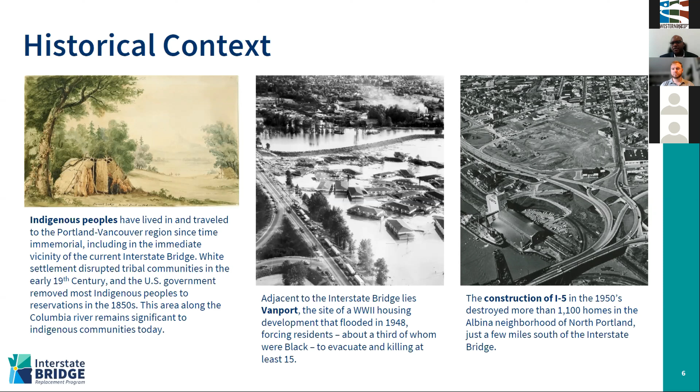As indicated earlier, the construction of I-5 in the 1950s destroyed more than 1,100 homes in the Albina neighborhood of North Portland, just a few miles south of the interstate bridge. The reason why that's important is as ODOT has been trying to advance the Rose Quarter improvement program, it is still stuck in this very deep and troubled history. That's kind of what's been impacting that project's ability of moving forward. So how do you really integrate equity in a way that is restorative and intentional? How do you leverage significant investment to improve the Rose corridor, but also pay tribute and homage to the long history, and leverage those dollars in a way you can never repair, but you can hopefully lessen some of the pain and create new opportunities. That's kind of the challenge in some of these projects.

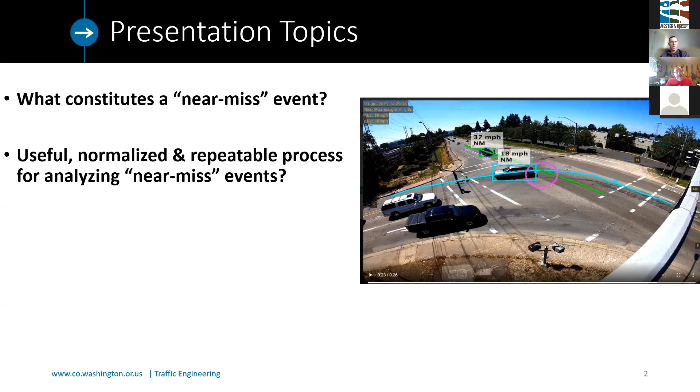So you might have heard this term, different vendors talking about it: big data, artificial intelligence, machine learning. The reality is you still got to look at the data, and you still got to have common sets of definitions like we heard in the previous presentation, so that we can be talking from the same page and comparing apples to apples. And then for this use case, we looked at 14 intersections across Washington County, our higher crash locations. And when we're looking at these data sets spatially, not only from a temporal standpoint, but spatially across the county, how do we normalize so that we can do that fair comparison of these results and do some sort of relative metrics?

And then we wanted to ask the question of, okay, well, we've got some near miss information related to left turn crashes at intersections. How do these relate to our reported crashes? We'd expect a fairly strong correlation between the two, but we didn't know for sure. So I'll talk a little bit about that, and then talk about how we're using some of the data to identify some lower hanging fruit for safety treatments and some future research needs.

So the tool that we used for this analysis in Washington County is Street Simplified. And that's a whole different presentation about their tool set. I'm going to skip to the meat of this, which is they have some assumptions that they've made when they deliver the data to their clients as far as what constitutes a near miss. So what they're assuming, at least as a default, is all movements, all roadway users, all types get counted, all the different speeds get counted, and then all of the severities that they use as their metric, but also post encroachment time.

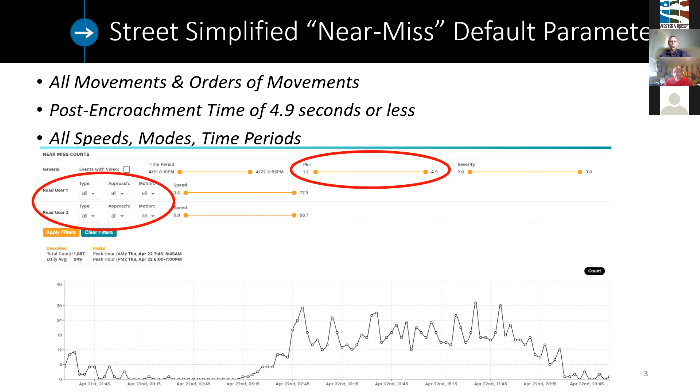That's what this PET is, that's circled. They're making the assumption that, at least out of the box, everything that's 5 seconds or less as a post encroachment time is called a near miss by them. Watching the videos and looking at it with some engineering judgment, a good portion of these events are not necessarily high risk or even what I would call near miss.

So what we focused on in our analysis was looking at, for left turns, those vehicles that turn in front of oncoming traffic. So again, order is mattering. If somebody's kind of aggressive as a sneaker and they go right after the vehicle that's oncoming goes through the intersection, that's not as big of a deal as someone that is turning in front of oncoming traffic. That is much more likely to generate a crash, or in our opinion, a near miss.

So we have the ability, at least within this software platform, to filter that by motion first for roadway user 1 left, and then roadway user 2 setting it up as motion through, and then running a query on the results to look at that.

And then we also used the post encroachment time threshold. We subjectively set that at 3 seconds. That's based on watching some videos and knowing that we only have 1 day or 2 days, or in some cases 3 days worth of data at each intersection. The vast majority are 1 to 2 days. So we don't have a ton of data over time. We're trying to infer some information from relatively limited sample sizing.

For that reason, we went ahead with something that's a little bit longer of a post encroachment time than what we otherwise might use. So we ended up using 3 seconds. I would submit that something probably closer to 2.5 or 2 seconds are really those higher risk type events. But using that 3 second threshold allows us at least to have something consistent between the intersections to look at, and allows us enough data to do some analysis.

I think our values were a little bit less than that, but I'd have to go back and look at the data. So again, those were the near miss thresholds that we used: turning in front of oncoming traffic, and then a PET time less than 3 seconds.

And what we saw in looking at some of the data is that no two events are the same. Context really matters. So you got to watch the videos, particularly for these higher risk events. But the nice thing is that as you use these thresholds of lower post-encroachment time and constraining that movement order, you exponentially reduce the number of events and videos that you have to watch. So that's a good thing. That makes it a little easier to look at the context around each event.

But it is interesting to see the different modal users at the intersection and the context for the traffic signal phasing and what's going on as the events happen. And then, at least for Street Simplified, they stratify the data into these near miss versus speeding versus red light running versus blocking versus jaywalking events. So you've got to watch not just the near miss events, you want to look at the other high risk events too, to get a better picture of the high risk behavior that's happening at the intersections.

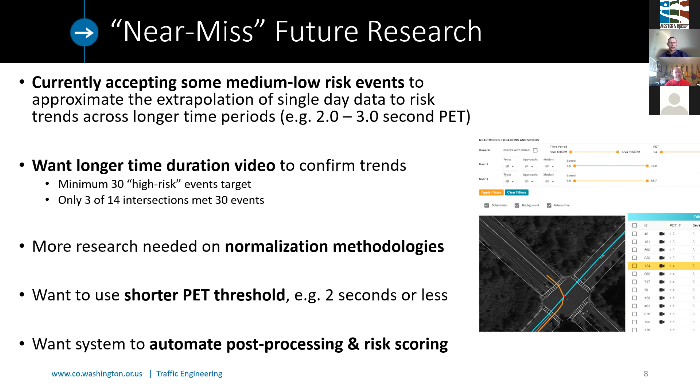So the other piece we looked at was comparing crashes to near miss events. The challenge here is, again, we were looking at very low trend data for the Street Simplified data, 1 to 3 days. And then we compared that versus the 3 most recent years of left turn related crashes, 2017 to 2019. So we've got a mismatch already in the dates and the scale with which we're analyzing this data. We just want to throw that out there.

But we still went ahead and did the comparison, trying to isolate as best we can. The isolation is really around normalization for near misses. We looked at it based on just using time, trying to make sure the time periods overlapped for our intersections. Then we looked at a time and volume-based normalization, where we combined the two approaches.

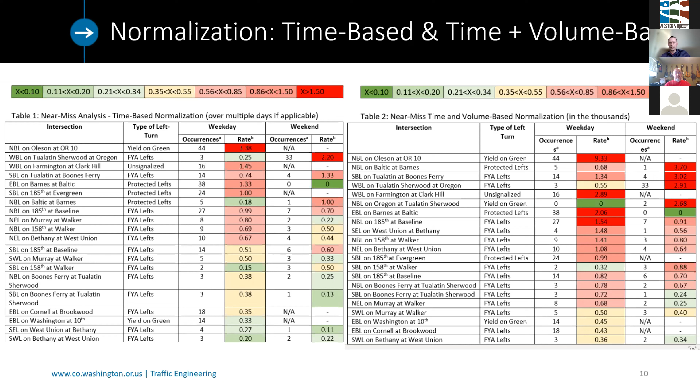And then the near miss time and volume base—this is a different normalization methodology, again isolating to about thousands in ADT. This looks at the differences between rankings, so you can see them side by side. We've tried to use color coding to show gradation there. The near miss rates are interesting—you can glean some information off of weekday versus weekend, and then the different normalization methods. They produce similar results, not the same, but similar, comparing the two.

Then if you look at table 3 in our report, which looked at crash rates versus our near miss rates—we held the crash rate, sorted by crash rate, and then looked at near miss normalizations. What this shows us is not a great correlation. We went through and did a little statistical analysis on the actual correlation coefficient. Something that is a 1 or -1 is a perfect fit, and 0 means no relationship between the data sets. The time-based and time-and-volume-based normalization results weren't a great fit for crash rates versus near misses.

The two normalization rates have a pretty close fit, which is good—that's what we would expect. But the crash rates do not match up very well, at least in this first pass at looking at 14 intersections here in Washington County for left turn related crashes.

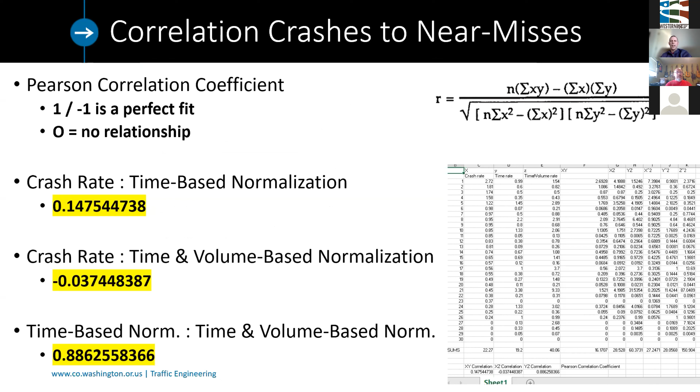But not all is lost. We went through and still looked at the videos. We made some judgments around which locations were the most egregious and where we could actually do some things. So you see rank number 5 here, this westbound on Tualatin Sherwood at Oregon Street.

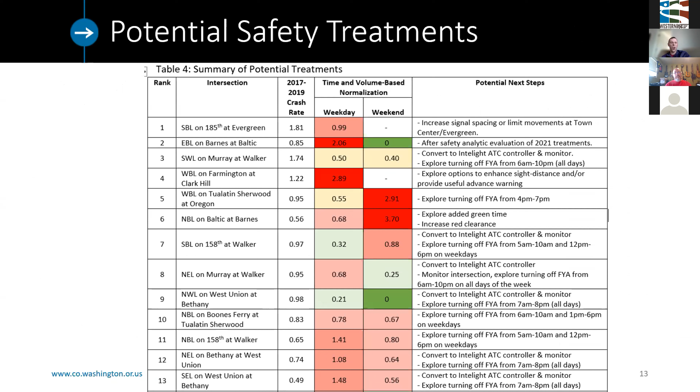We've actually explored turning off the flashing arrow. In the meantime, we've actually made the flashing arrow harder to turn on. So there's a number of different things that we've done to try to take the data and think through low-hanging

and higher cost treatments. So, from a signal timing perspective, we want to upgrade our controller so we have higher resolution logging. We want to look at modifying those left turn parameters, again making it harder for that flashing arrow to turn on. And then also making sure that we've got some of the different tools in our toolbox for separating conflicts between pedestrians and left turning traffic, and reducing pedestrian delay at some of our intersections.

And then the heavier handed option is to actually turn off the flashing yellow arrow or the permissive left turn by time of day, which we've done at 2 of our highest crash locations at the county.

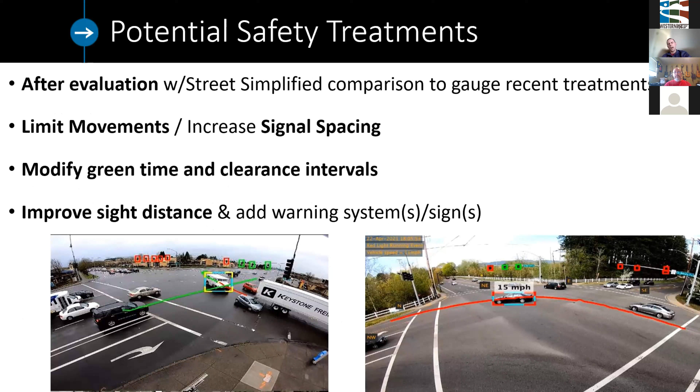The other options that are out there are limiting movements, increasing signal spacing, modifying the green time and clearance intervals, and then looking for ways to improve sight distance or adding warning signs, striping, other things that are more traditional.

So again, just to reiterate, the research needs regarding near miss is we need a consistent definition of what a near miss event is. We need to, as an industry, think through what those minimum samples are to reliably gauge near miss events and kind of the time period of video that we might need to produce those number of samples of higher risk near miss events, because it'll inform scoping for projects.

And then I think we need more research on normalization methodologies and kind of looking at what's reasonable to expect for the fit between crash data and these near miss events. And then obviously we want to automate a lot of this process.

So in conclusion, the near miss data is useful, at least as a starting point for augmenting some of the crash data. There's not a great fit between the two, but I think it's useful in augmenting and trying to be proactive in managing safety and conflicts at our intersections.

Just understanding that that subjective versus objective is still out there. And as an industry, we want to try to at least be transparent when we're making a subjective claim. And just note that this comparative analysis appears based on my conversations and interactions with folks in the industry and talking to some of the vendors.

It seems to be in its infancy. I think a lot of the vendors are trying to build tools around what we want. But as a community, we need to have a clear definition of what's going to be useful to us so that we can define how we want vendors to set up these tools to automate.

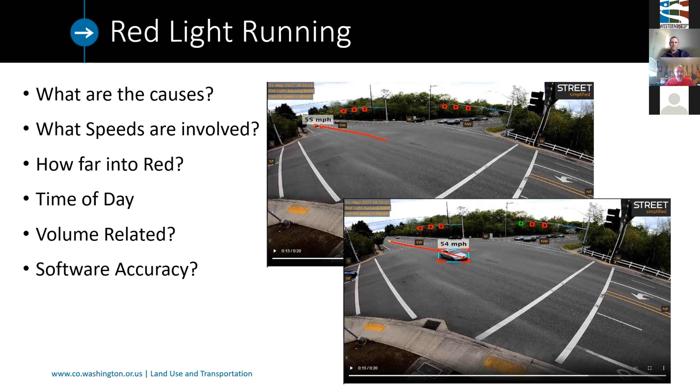and if the events are a function of the roadway volume. This also gave us an opportunity to do some QA/QC on the street simplified algorithms, although we're only able to determine if the algorithm correctly categorized the event, not whether or not the algorithm caught all the events.

Here's a quick example of what you see when you look at the video from Street Simplified. And you can see it shows you the indications and the trajectories of the car. And so here comes our red light runner.

And we could probably skip the next one just for time. It's just another example. Probably go to the next slide after that.

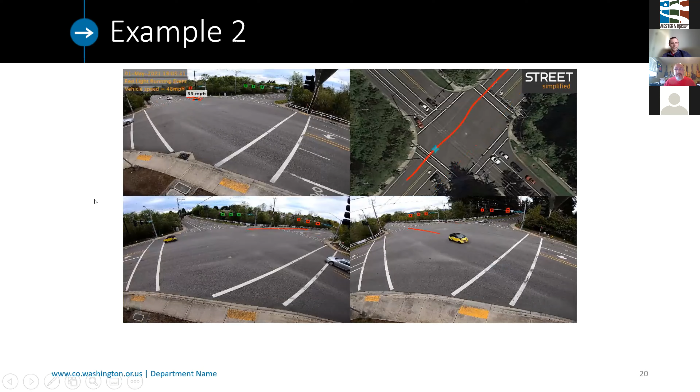So I had 13 high crash locations, one of which Sean looked at was a non-signalized intersection, which gave us about 27 days of data. They have video recording with 2 cameras at the intersection, and then they process the data to determine vehicle and pedestrian volumes, near misses, red light running, and other metrics.

For this analysis, we looked at red light running for the through movements only, which gave us about 750,000 entering vehicles to look at. Red light running was defined as a vehicle passing the upstream crosswalk line after the red indication was presented.

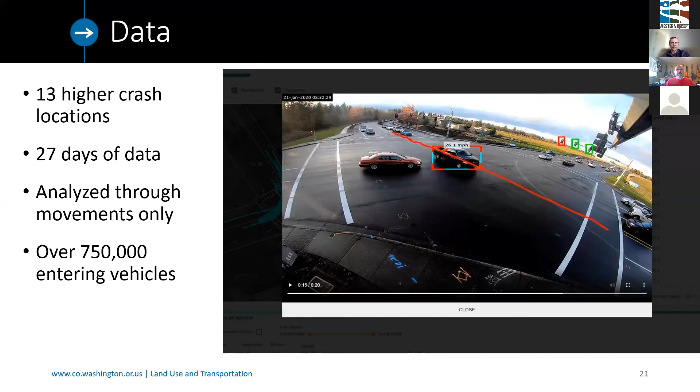So we have our probable causes, and we figured there were about 5 basic reasons why you would run a red light. First would be an emergency vehicle, like fire, police, or ambulances - for this analysis we took those out. Second would be a blatant disregard for the red indication, or maybe a distracted driver - we expected those would occur late into the red time.

Third would be if there was congestion downstream and the driver doesn't want to wait through another cycle, so they sneak across. The next would be a late night low volume occurrence, when you pull up to a red light, assess it, see there's no one coming, and go ahead and go through. Lastly, we have drivers who determine there's enough amber or yellow time to get through the intersection before the red indication, or who've determined they don't have the ability to stop safely.

We're working with Street Simplified to get a report that will give us a couple different speed points, one at the beginning and one at the stop bar, so we can tell if people are speeding up or slowing down as they come into the intersection.

After filtering out all the emergency vehicles and events that were logged incorrectly by the algorithm, be it a bike or a wide turning truck or a train, we tossed those out. So we had about 335 separate events.

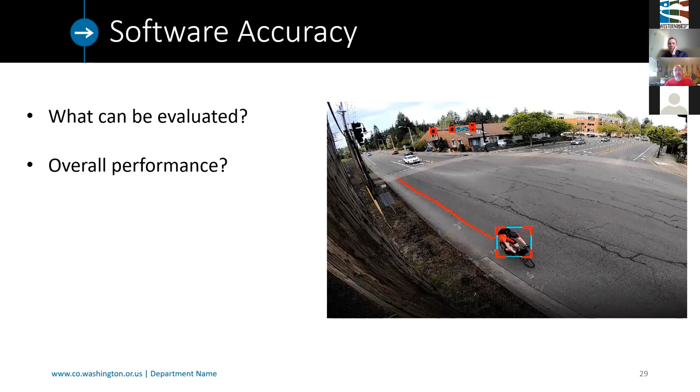That's specific to red light running, the filtering they're doing for that portion of the algorithm. They do try to split out counts, so that's kind of a separate module that Street Simplify does. But good point, Matt, you saw a number of those wide turning trucks that got called red light running when they were really just going green on their left turn. But overall, the software did a really good job of discerning which ones were and which ones weren't running the red lights.

So the conclusion we came to was that most of them happen shortly into the red, and there's a small percentage where possibly a red light clearance extension could help. And of course we need to look at more data since we didn't have as much data as we would like.

I'm all done, further research is always needed. I think we had about a half an hour and we're probably right at that point. So I don't know, Cadell, if you want us to take a few questions now, or if you want us to wait to the end of the session.

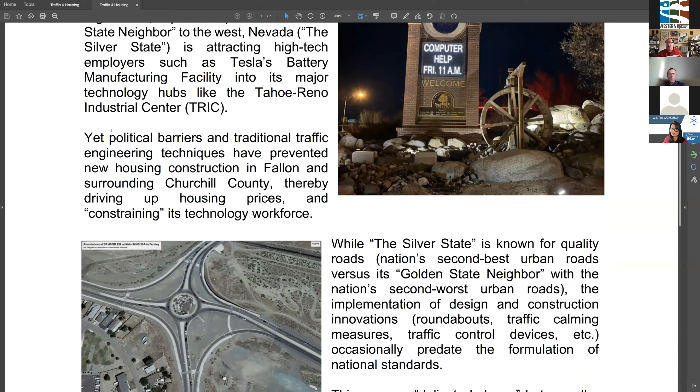So Fallon, great place to live. The challenge is that the housing hasn't necessarily kept up. We have a lot of great community amenities, but as far as housing is concerned, a 1950s farmhouse with an upgraded kitchen is still a 1950s farmhouse. And you have a lot of folks who come to Fallon from places like San Diego, where the housing opportunities are amazing. So that's the flyer on traffic for housing.

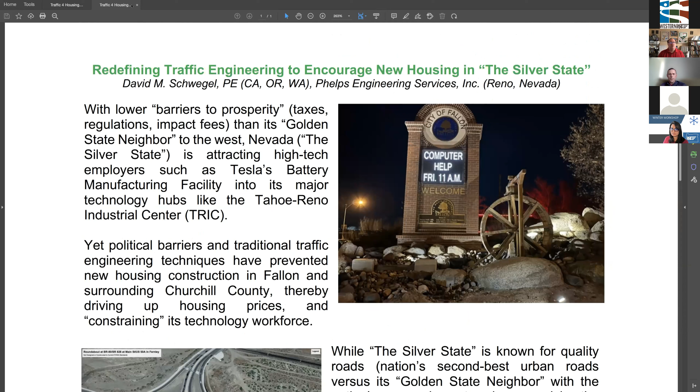Now, I had a chance to take a look at some hot topics when it came to housing in Fallon relative to other places in the nation. The big call to action for us as traffic engineers is to try to reinvent the traffic engineering profession so that it is much more friendly toward housing development, namely creative transportation infrastructure funding mechanisms.

So a lot of the folks who work at the Fallon Naval Air Station come up from San Diego, and this is the type of housing that they are expecting. They are used to the pools and the wading pools, multifamily residential, views of the ocean, and numerous amenities within the community center. So typical housing in the San Diego vicinity, a source of a lot of the folks working at the Fallon Naval Air Station, gives them high expectations when it comes to housing.

Here's the flip side. You have a jobs-to-housing mismatch in Fallon. You have the Fallon Naval Air Station, which has a very innovative campus layout and is a major technology employer in Churchill County. However, this is the typical housing you'll see in places like Fallon, Nevada: mobile home parks, and then your high-end housing, single family detached, built in the 50s.

Now, there are a number of development projects in the works in Fallon, namely the Coleman Road multifamily residential development project, proposing 425 multifamily housing units to significantly transform the housing situation in Fallon, where we've seen almost no new multifamily residential construction in the past 30 years.

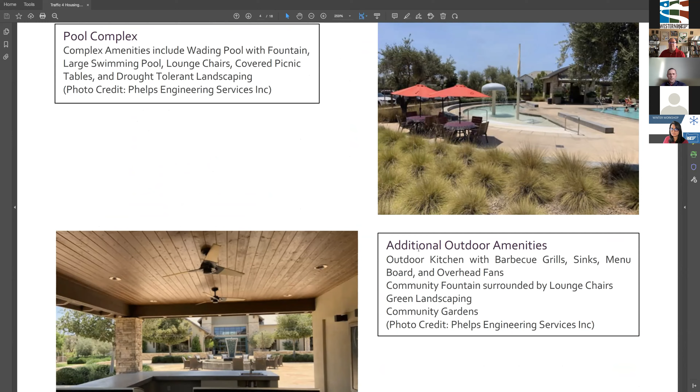What we start with is asking the question, why invest in the silver state of Nevada? Now, Nevada, unfortunately, is not number one for driving — Oregon took that position. Nevada has around 3.2 million people, the 7th largest state in geographic area, significant diversity in density, and less rain falls in Nevada than any other state.

So you'd think places like Churchill County and specifically Fallon, being branded as the oasis of Nevada, would attract lots of investment and lots of housing to the silver state. But in reality, Fallon is beyond the Northern California mega region. It is beyond the Economic Development Authority of Western Nevada's influence area, and consequently has not had the advocacy in housing the way Reno and Sparks has.

So why invest in the silver state of Nevada? Like Oregon, Nevada has significantly fewer barriers to prosperity. Oregon, I understand, is one of the least expensive places in the nation to do business, which would explain why you've been so successful in places like Medford at attracting a number of high-tech employers. Nevada, like Washington, does not have a state income tax, and it also does not have anywhere near the barriers to prosperity that a regulation-on-steroids environment like the Golden State to the west has.

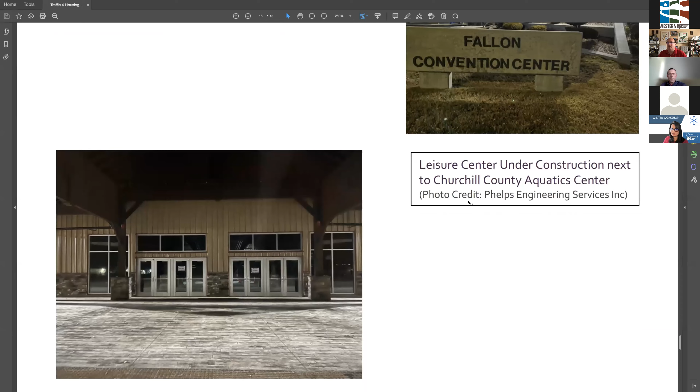And then of course, Carson City. Carson City is an independent city, the only city in Nevada that is not part of a county. A major event is Hot August Nights, and the Batmobile tends to be quite popular. Carson City, of course, is named after Kit Carson. And within the Nugget, you have a lot of historical imagery.

And of course, Nevada is well known for entertainment. But let's take a quick dive into the PowerPoint and see what it is about the Silver State that's attracting a lot of attention.

So specifically, among the nation's 10 most business-friendly states: no corporate or personal income taxes, low-cost startup, regulatory license and annual fees, high-tech workforce, port accessibility, and aviation, although I should mention that LAS, Las Vegas, would definitely benefit by having an automated people mover between the airport terminal and the remote car rental facility.

It took me a good hour to get from the airport terminal to the rental car facility to rent a car to drive from Las Vegas to Reno, which is close to a 460-mile drive.

Nevada, interestingly enough, does not have an interstate freeway system that connects the two major population centers. And of course, there are low utility rates, abundant commercial real estate, an abundance of visitors, and of course, scenery.

And NDOT has had a number of successes, including the Connect Rail Plan, the INFRA grant for I-15 Tropicana, Information Superhighway and innovations in broadband, ENR Owner of the Year for Project Neon, and Interstate 11, which they're going to start building south to Phoenix, and then eventually it's going to go north, with the route through Fallon being the preferred route. And prepare to stop when amber flashing signals on the high-speed approaches are becoming more and more commonplace.

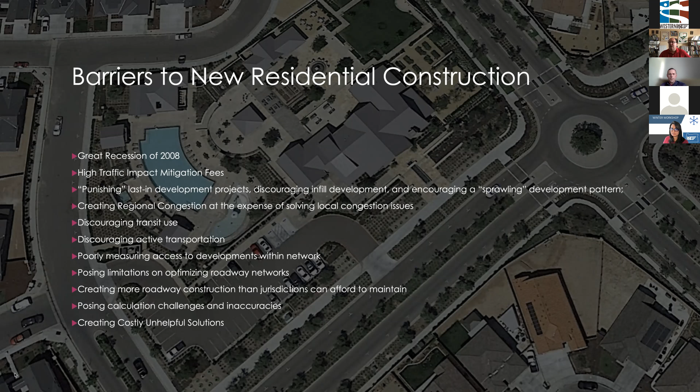These are a number of areas they addressed regarding challenges. They wanted to make it easier to build housing in California because traffic impact mitigation fees were getting so high that developers simply didn't have incentive to build anything other than high-end residential, whereas the huge need was middle to low-end residential.

You'll notice there's early adoption of new innovations in places like Fernley. The roundabout in Fernley was actually built before national roundabout standards were well established. Then as different parts of Nevada grew, we saw quite a bit more innovation in areas like Reno and Incline Village when it came to roundabouts.

The I-11 is definitely needed because I've made the drive from Las Vegas to Reno. There is an Area 51, and an Alien Cafe as you enter the gateways to Area 51. It's primarily a lot of two-lane roads. We want to make sure we're able to find creative funding mechanisms for transportation, primarily heavy investment in grant funding, high capacity intersections.

We want to make sure we're able to put multifamily close to retail and employment, because unfortunately the mark was missed with the Tahoe Reno Industrial Center, and complete streets placemaking, multimodal connectivity. The 15-minute community concept I see is a major innovation that started in Portland and has caught on in much of the rest of the nation.

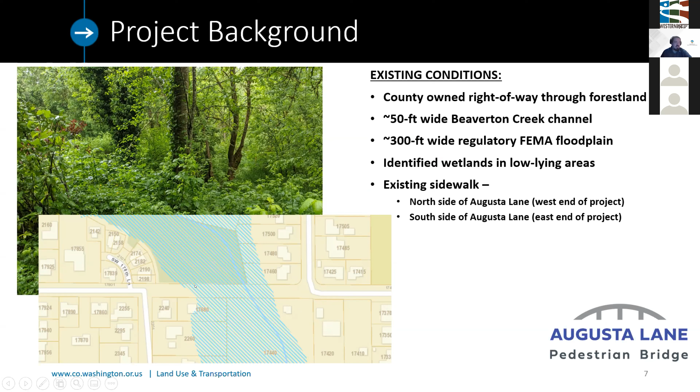Each end of the project only has existing sidewalk on one side of the road, the north side on the west end of the project, and the south side to the east.

So the main goal of the project is to provide year-round walking and biking access to nearby amenities to make a more livable and healthy community.

I highlighted the term year-round since this was a point of discussion in the project planning and budgeting process. The initial plan was to have a bridge only span Beaverton Creek and be shorter in length, while the rest of the path would just follow the natural contours of the land.

Since this was meant to provide a vital year-round link to the elementary school, the project team felt it was important to keep the entire trail above the floodplain to avoid winter shutdowns and minimize maintenance costs.

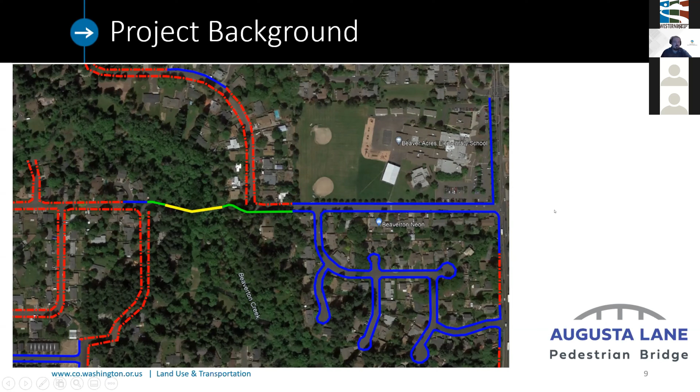Next, I'll be doing a deep dive into some of the unique project design elements for this bridge. I'll be covering more of these topics in more detail, but did want to highlight that we had restrictions on grades in this project to make sure the path was ADA compliant.

One unique aspect of this particular bridge is that the foundations were designed internally by the county, while the steel bridge was designed and fabricated by the contractor. Since there are many steel bridge fabricators in the US, we wanted to provide a competitive bidding process to ensure we got the most economical bridge.

By designing the bridge foundations internally, design costs were kept low and under the county's control. The design team came up with assumed load reactions to complete the foundation design, and these values were shared with the contractor to ensure their design would not overload the piles. To simplify design further, we used 2 identical span lengths, so the contractor could use the same design for both bridge spans.

It was decided early in design that the bridge would be constructed with weathering steel. The material allows for a longer clear span compared to other materials such as aluminum, while the weathering allows it to blend in more easily with the natural environment. We also decided to specify Brazilian Ipe timber decking due to its superior performance and resistance to insect damage, rot, and long-term shrinkage.

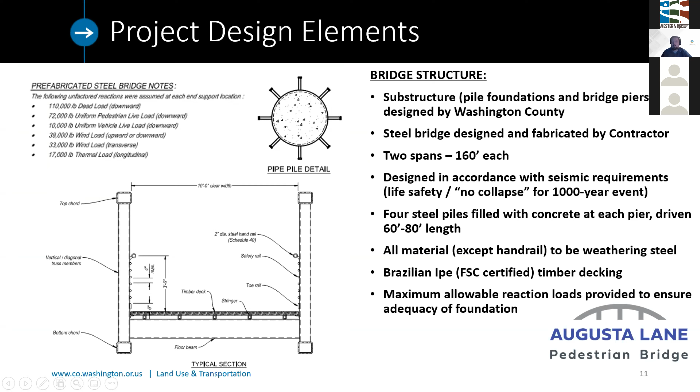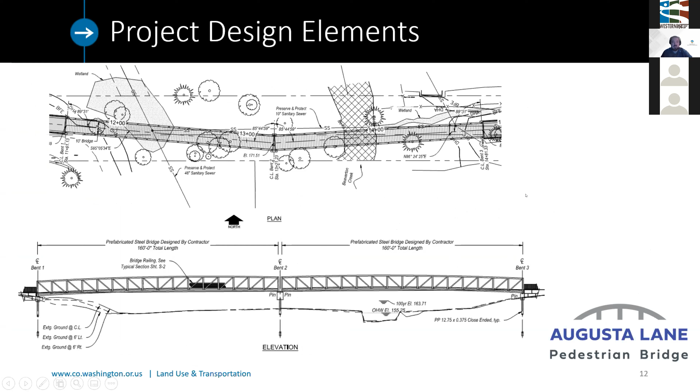On this slide, I provided the plan and profile views of the bridge as shown in our contract drawings. You'll note that the bridge has a deflection point in the middle pier, which added complexities to the design and construction. While a straight bridge alignment would have been preferable, this alignment was chosen to move the bridge further from the adjacent homes at both ends, while also avoiding wetland impacts, underground utilities, and mature trees.

Related to the bridge design was the complication of working around existing sanitary sewer lines. These lines were the original system built in the 60s and are reaching the end of their design life. A particular concern was the 8-inch service line that ran parallel to the bridge footprint. Despite shifting the middle pier, we could not avoid the service line at the east abutment. We adapted the foundation design to minimize impacts to the line, increasing the pile spacing to provide as much separation from the sewer line as possible, as well as requiring the contractor to provide a pre and post construction video inspection of the pipe.

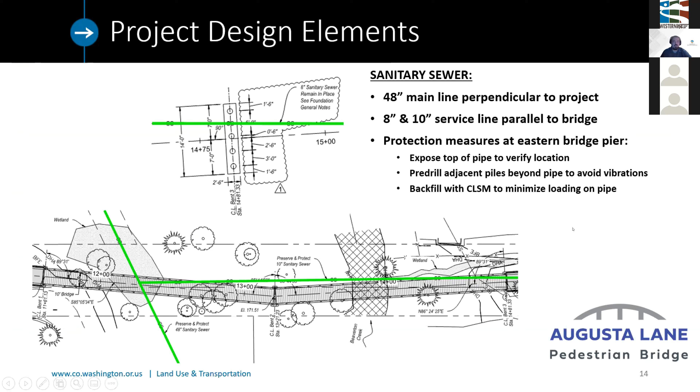At both ends of the project, we installed combined bicycle access ramps and ADA accessible ramps. These ramps allow bicyclists to return to the shoulder bike facility at both ends, while also allowing wheelchair users to access neighboring streets. These ramps also served as the natural transition from our 10-foot multi-use path to the existing 5-foot sidewalk located at both ends.

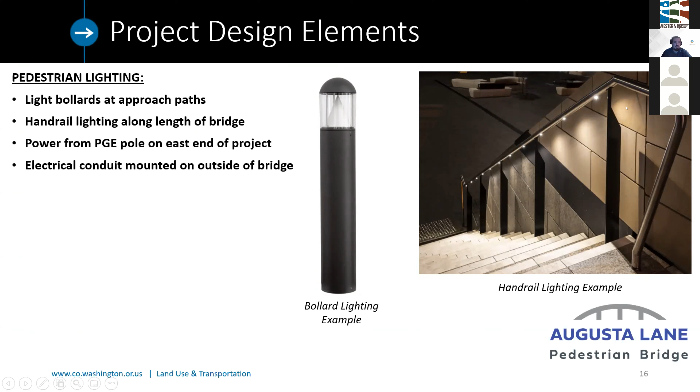Another important goal of the project was to provide 24-hour safe access through the neighborhood. Since the bridge crossed undeveloped forest land, there are no ambient light sources to help illuminate the path. So the design team implemented pedestrian scale lighting at the approaches and along the bridge span. For the approaches, we opted for LED bollard lighting located outside the path footprint, and along the bridge, we selected a proprietary LED system embedded in the handrail tubing.

As part of the project, we also added planting to the vegetated corridor on the site. A vegetated corridor is defined as a swath on both sides of natural resources to be protected from development, providing a natural buffer to these resources. For this project, we added plantings to all areas located within the right-of-way, whether existing or not. This resulted in the project enhancing 0.22 acres of existing vegetated corridor and adding 0.05 acres of new vegetated corridor.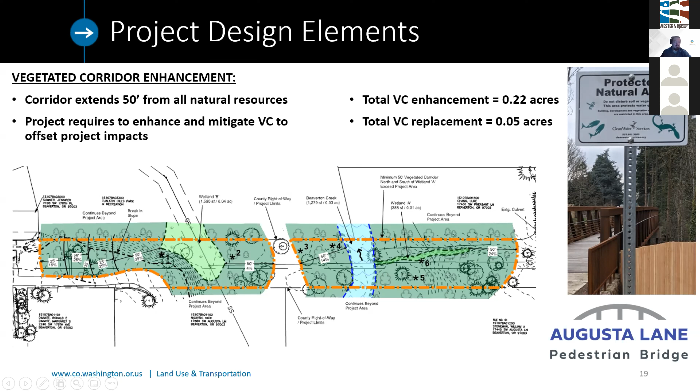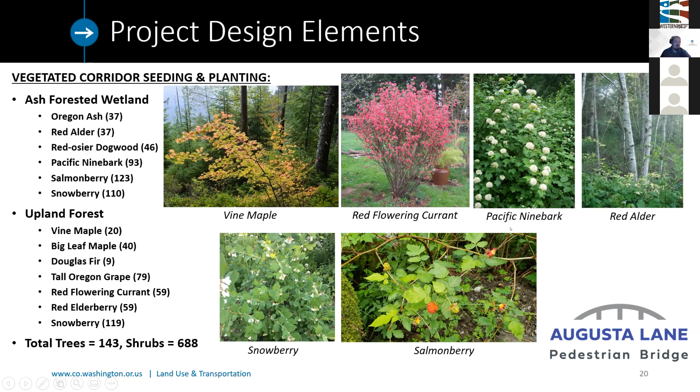The project included 2 different plant communities within the project limits: ash forested wetland, areas frequently inundated with water, and upland forest communities above the floodplain. Plant species were carefully selected to match existing vegetation in the region. In total, we planted 143 new trees and 688 new shrubs.

So while we all wish that our projects would be completed without any issues or challenges, we know that is simply not feasible. Following is a highlight of the larger issues encountered during construction.

If we decided to build the access road on the west side, we'd have to add fill to the wetland to create a road accessible by a crane. Constructing an access road on the east side is only marginally better. While topography is more favorable, we'd also have to contend with going over Beaverton Creek. Our design team worked closely with ODFW to provide specifications that ensured the temporary access bridge would span the entire creek channel and minimize impacts. At that point, we made the choice to provide access from the east side.

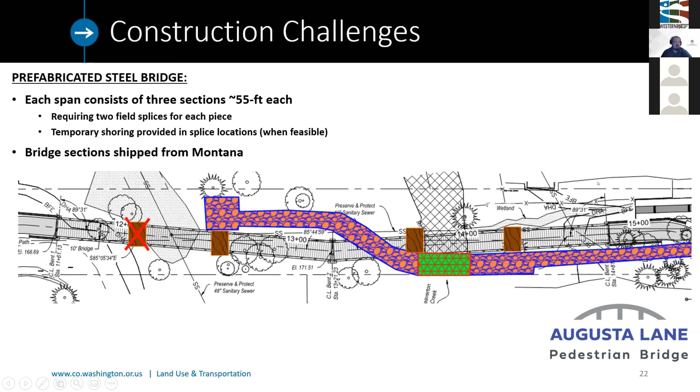The temporary gravel access road comes in from the east, crosses over the creek with a large crane pad near the middle pier so it could erect both spans. I have a few slides that show this plan in action.

On the left, you can make out the twin crane setup they used when they couldn't do shoring. The smaller crane on the right is sitting on a driveway, simply there to keep the first section suspended, while the larger crane then picked up the next section and moved it into place. You can see it on the right side of the crane bringing the section into place, where they would then splice the 2 sections together.

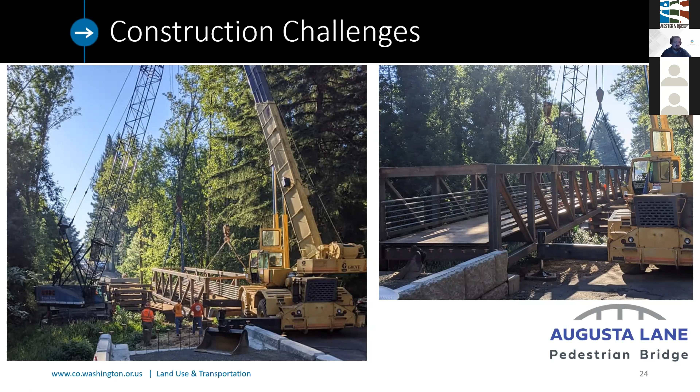Next, we ran into a few constructability issues related to the bridge fabrication. While the project plans indicated a pinned connection at the middle pier, the steel workers erroneously installed expansion base plates at this location. While this wasn't a catastrophic error, it did mean the design needed to be modified to account for thermal expansion and contraction where the 2 spans met.

For the handrail, we came to a solution that involved installing a smaller pipe sleeve in one span with a bend to match the angle of the other span. That way the sleeve could slide back and forth in one span and provide a continuous handrail.

Similarly, the fabricator did not provide a plan for providing a continuous safety rail at the middle of the bridge. Per standards, pedestrian rail can't have any opening larger than 4 inches. With the deflection at the middle of the bridge, we had an opening between these two members that was closer to 3 feet. So the contractor came up with a small panel that was independently welded to each bridge span, while also providing a small gap between the two to allow for expansion and contraction.

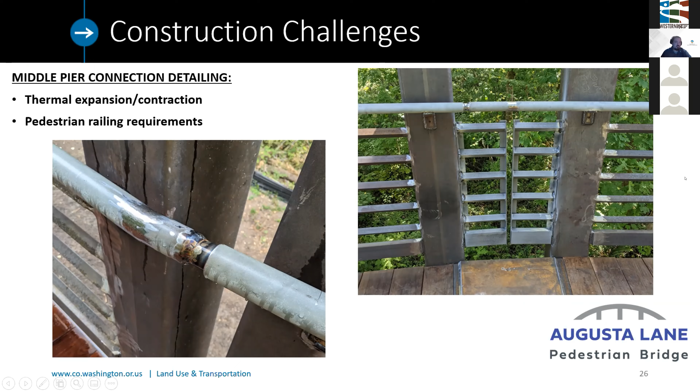The last major issue that arose from this project stemmed from complaints by adjacent property owners. Since this project was literally built in their backyards, they saw firsthand many people walking on their property to gain access below the bridge. So to be good neighbors, we had the contractor install protective fencing to provide some privacy and restrict access under the bridge.

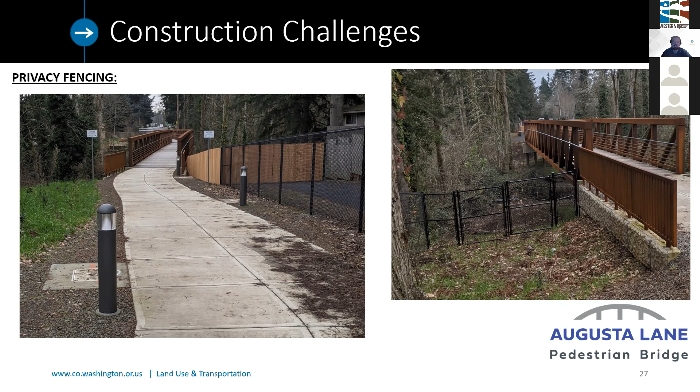Now that the bridge was built, of course we were curious to see how it was performing. We had a consultant collect bike and pedestrian counts several months after the grand opening. This data was collected just recently on February 17th, which showed that 101 pedestrians and 14 bicyclists used the bridge in a single day. It should be noted that this data was collected on a cold February day, so it's likely skewed to the lower end of counts. We do hope to get a second set of counts in the summer months to see if we get higher usage. Either way, this does show positive usage of the bridge.

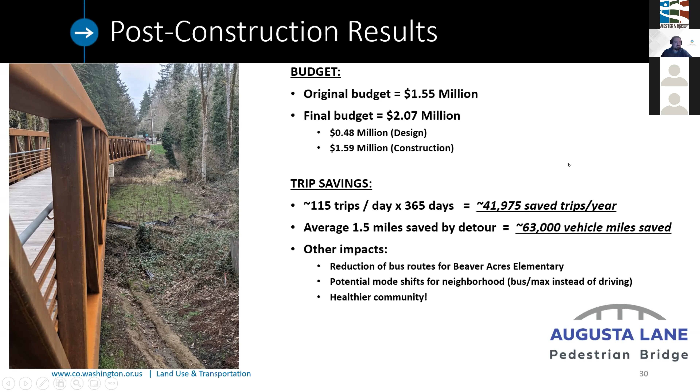Of course, with every project there are lessons to be learned. I believe a lot of the resistance from the community in the early design phase was a direct result of inadequate public outreach. When the county held an open house, the decision was already made and people felt like their voices weren't being heard. By engaging them early and often, the design team could have helped address many of their concerns and been better equipped to incorporate the community's feedback.

The project was also on an aggressive schedule, being completed in less than 15 months once funding was allocated. There were many discussions of adding extra features such as art pieces, interpretive information plaques, and benches. However, due to the tight schedule, there just wasn't enough time to coordinate this work with the park district.

Finally, better coordination between the bridge fabricator, bridge installer, and our inspection team could have helped avoid many of the unnecessary construction issues. However, we were fortunate to have a great contractor who was creative in coming up with practical solutions.

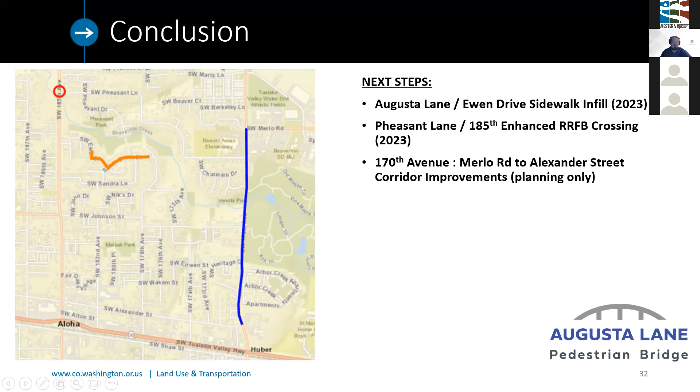I'd like to briefly acknowledge the great partners we've had on this project. I won't individually name them all, but each played a vital role in ensuring this project's success from inception to completion.

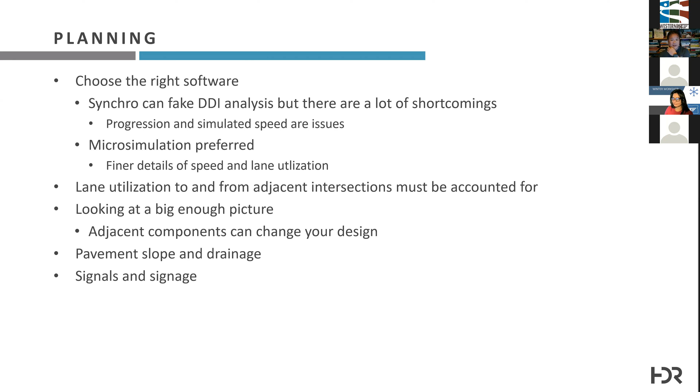We found in a lot of cases that the adjacent intersections - how they're designed, how they're laid out, what the traffic patterns look like - can drive how your project works. Even if it's outside your limits of construction, it can make a difference in what your final design looks like at the interchange terminals themselves. Towards the tail end, I'll cover a little bit about pavement slope and drainage, as well as signals and signage. But let's look first at adjacent intersections.

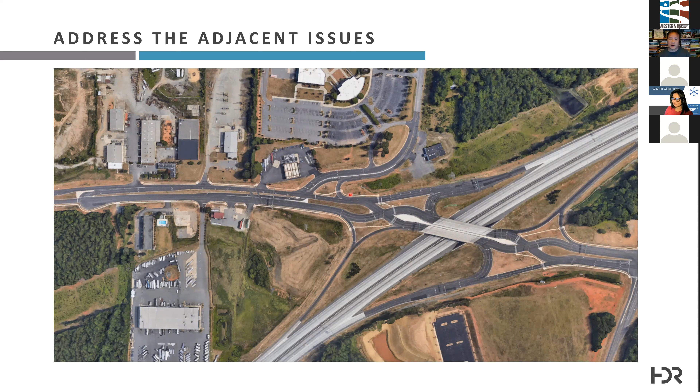And this is one of those cases where we could not have left the T intersection by itself. No matter how we worked it, even though it was a minor street, the ramp terminal was going to have impacts from the westbound queue coming off of that signal, just because of its proximity.

So let's go to a different DDI. This one is outside of Salt Lake City, Utah. And this is also a very unique situation where when this originally opened to traffic, this used to be a free flow right turn going into an add lane type situation. And these 2 lanes coming out of the core of the interchange, they were going to be basically free. So the right turn could come together and boom, you're done.

Now the problem is, if you look at the way the ramp terminal is designed, for starters, even without the geometry, the main issue was this turn over here services a couple of fast food restaurants, a couple of gas stations, and a convenience store. So there is very little distance in between this merge point right here and that particular access.

That's a weaving situation that we simply didn't notice or didn't take into account because it was outside of the limits of construction. From a capacity standpoint, this is a 3-lane section as you go further down. So we saw, hey, chance to do an add lane, 2 plus 1, 3 is a straight shot and you're done. However, this did create a weaving issue right in here.

And that weaving issue is complicated by the fact that if you think about the geometry, this particular movement coming out of the core, the point, this is still turning to the left. This pavement on the ramp, this is still turning to the right. So the point of tangency of both of those alignments is somewhere out here.

So what was happening was we were noticing the vehicles would come out of the right lane, out of the core of the interchange, and simply not finish the turn. They would basically just go tangent prior to hitting the PT, and cut across in order to access that driveway. Even though we didn't have any accidents in the first couple of months this was open to traffic and allowed to function like this, we noticed a lot of near misses, and almost all of them were going to be that angle type side swipe type accident.

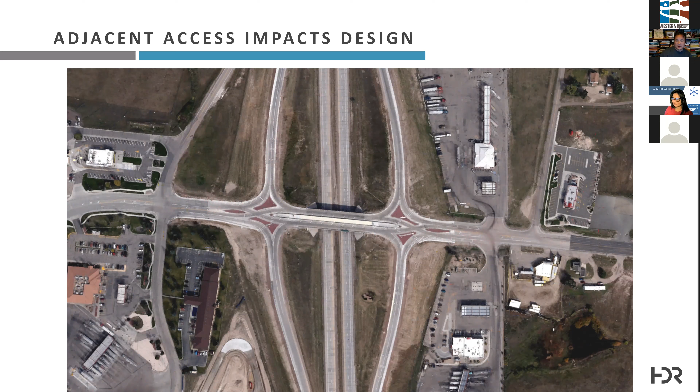Working with closely spaced intersections, off to the west here is a very low speed frontage road with next to no traffic going up and down it. Most of the traffic comes to and from the south and east—a massive amount, to the point where even though this is a low volume intersection and this is a low volume intersection, you can see this has a dual left turn going in this direction.

We were asked, can you make a DDI work here? If you were looking at a standard type DDI, there's no way, because you can't bring the roads back together in time to go into a T intersection at that existing frontage road. West of the frontage road is a big barren lake that can never be developed, so that frontage road is never going to carry a lot of traffic. So what we developed was kind of a hybrid of a DDI for this location.

This did not go into construction, but what you see here is 2 unsignalized T intersections off to the west on a frontage road, and basically a more 'normal' DDI off to the right-hand side. So this is again one of those locations where what's adjacent to us drove how the interchange was designed, drove how the project was designed.

From a plan view, one of the things we noticed right off the bat working with diverging diamond interchanges is they tend to freak people out when looking at the plan view—going 'oh my God, what is that?' One of the things we heard a lot about was this idea that you're going to make me drive on the wrong side of the road.

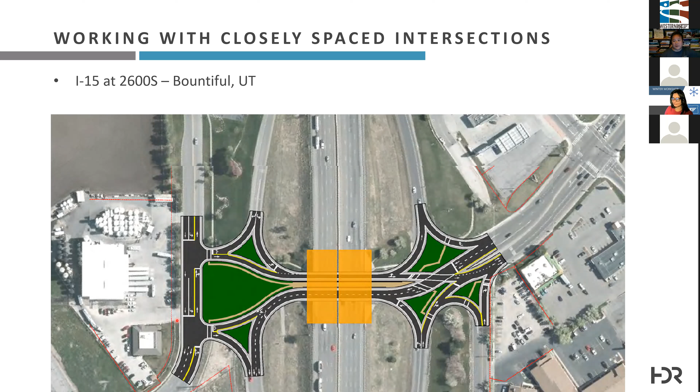All of that boils down to public involvement. With DDIs, especially if you're the first one on the ground, it's more an element of public education. One of the things we found very true in terms of the outreach was with elected officials, stakeholders, and agency officials, the fear of how the public was going to react was actually worse than how the public reacted.

Although, to be fair, when we went to the public meetings, more often than not, what you saw was the driver's perspective or the ground view perspective. We showed people what it would look like to drive through this interchange, and made them really well aware of the fact that from a driver's perspective, when you're behind the seat of the car, it looks like it's a one-way road that intersects other one-way roadways. That driver's eye perspective is a lot easier for people to digest. Just realize that when you're going to do a DDI, a lot of this becomes an element of public education.

Now, for this DDI, what you're seeing on the screen right here was one of Florida's first ever YouTube videos that actually got over the 1 million view threshold. This is actually taken about a year ago. I think they're around 1.5 million at this point. But we went way out of our way to basically enhance our social media presence with this particular interchange.

We went so far as to have quarterly update meetings with the local college, because this was on University Parkway, and local high school students. We also made sure to have a hands-on exhibit at the public meeting where people could drive little Hot Wheels cars through the plan view laid out on this giant table. In subsequent public involvement meetings, we've actually been able to put people behind the wheel of a simulator, with a steering wheel and pedals, so they could drive through the interchange with all the signing and striping in place and get an idea of what it would feel like to do this for real.

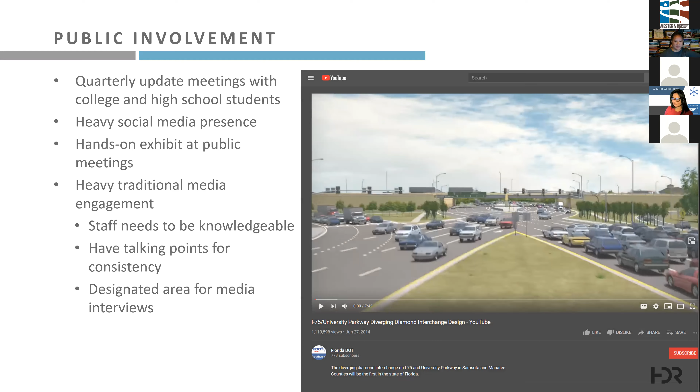So let's jump from public involvement to something that we really don't need to deal with in most of the state of Oregon anyway. But what I'm going to show you is an interchange in Minnesota where this was very much a thing. The crossroad that you see on the screen here belongs to the city of St. Paul. The interstate itself, I-35E, belonged to the state.

So one of the issues was how do snowplows manage to actually plow this? Because the city would plow east-west, the state would plow north-south, which meant the state was responsible for the ramps. But given that this was in the urban core of the city, if we were to get a snowplow out here, the left turns were not a problem, and the right turns coming off the ramp going west were not a problem, because there was a MnDOT maintenance yard just to the west of this interchange. But over here to the east, the northbound right turn, once you got past this point, all the lanes were 14 feet, and there was no place for a snowplow to actually be able to make that U-turn.

So what we did was we bowed out this particular shoulder and overbuilt a little bit of a pocket, and then made a mountable curb right here in the median. We made sure that median mountable curb was facing the wrong way, so that nobody coming out of the core would see it or see a use to do something like that and make that odd U-turn movement. But that movement, if you look real closely, has the auto turn template for a snow maintenance truck, so it can make this hook turn and then sit here, not protruding into the westbound traffic, and at the same time, the back end doesn't extend into the eastbound traffic.

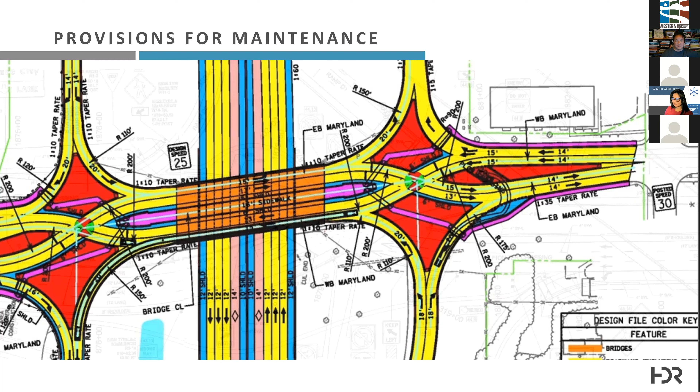Pedestrians, don't stick them on the outside. We made that mistake of putting them on the outside of the core of the structure. You can see over right here and right here. We put them on the outside for the first DDI we opened to traffic at Pioneer Crossing.

This is part of the I-15 core design build project just south of Salt Lake City. The reason I say that is because if you were a pedestrian walking from here and trying to cross and go that way, at some point you have to cross the left turning traffic. You have to cross free flow traffic.

And at that location, that free flow location is in a very, very odd place. The reason I say it's odd is because it looks like this. If you were to stand there on this crossing and look back, that's what you see. The abutment wall prevents you from seeing oncoming traffic.

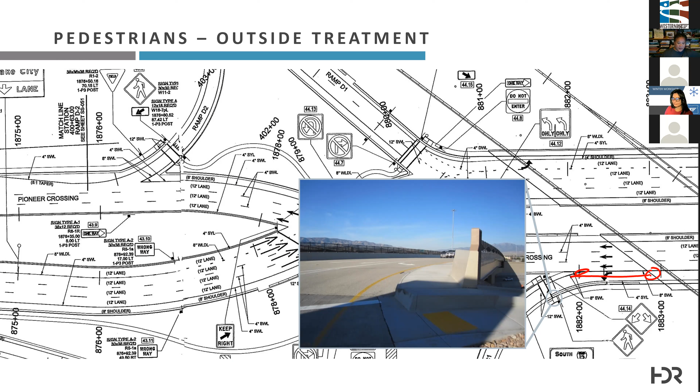At the same time, if you're a car moving in the westbound direction, you have no hope of seeing a pedestrian that's on the inside of that turn. So that was a big, big lesson learned that we didn't really account for at that point in time.

Now, here's the thing. If you're looking at a DDI, the main reason you're looking at it is because you have an exorbitant number of left turns in all likelihood. If you keep the pedestrians to the outside, they're going to conflict with those very turns that you're trying to build the DDI to accommodate.

So whether you're going with the interchange over or under the freeway, you're either going to be dealing with a bridge rail or an abutment wall. In either case, there's going to be some sight distance issues. And the further away you pull that crosswalk, the further back the pedestrian crossing will be, more into the point where a car is trying to accelerate.

On the other hand, if you pull it back this way, that also presents some other complicating problems, and the fact that you want to probably sign that pedestrian crossing with black on yellow signs, and you're running out of room to do so if you pull that movement upstream.

On the other hand, if you put the pedestrians to the inside, here they're crossing over and running right in the core. 75 is a little bit weird because the median is so large. You don't need two sidewalks. Most places that have the sidewalk on the interior just have one single multi-use path. So ignore the fact that there are two sidewalks in the center.

What you'll notice is if you put the pedestrians to the middle, they don't conflict with those high volume left turns that you were looking at earlier.

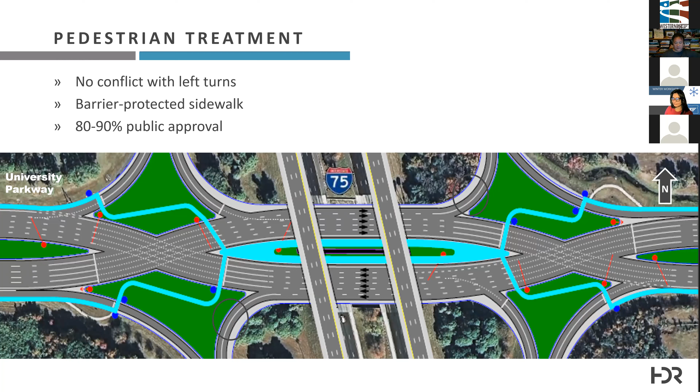On top of that, we found, based on studies in Utah, Florida and Missouri, that doing so, even though it's counterintuitive, putting the pedestrians in the center and in between live traffic in the middle of the interchange, the public actually really, really likes it because they're barrier protected as they cross the interchange, as opposed to being just on a raised sidewalk on the outside next to a bridge rail.

Now, one of the things you're going to hear a lot about when you start looking at a DDI design has to do with the angle of intersection. The angle of intersection is a good guidance, but the angle itself is irrelevant.

What you're going to find is this little piece right here is the critical element. You need to make sure that that juts out enough to prevent people from doing this. That is the single biggest safety risk.

And if somebody's coming through and they're completely unaware of what they're driving through, or they're inebriated, you don't want them to be able to go into the oncoming traffic in the core without physically hitting something.

In order to develop that eyebrow, you end up with a fairly large intersection angle. You'll end up in the 30, 35, 40 degree range, but that's more a function of creating the eyebrow as opposed to aiming for an angle and hoping you've created one. I can show you a couple of DDIs with 50-degree angles that don't have good eyebrows.

So let's go back to College Drive. This is that tiny DDI I was talking about in Wyoming much earlier in the presentation. This was the old condition. It was basically two lanes in each direction, and you'll notice there were no left turn pockets.

It was fairly large. What we did with this, though, the outer pieces of the bridge here and here, they were actually full depth under the sidewalks.

We milled out the sidewalks and shoved everything to the outside, and we originally wanted to make it look like this. You'll notice that in this example, those odd pork chops that I had in the aerial photography of the finished condition, we don't have them here. This looks very normal, very symmetric. There aren't these little odds and ends.

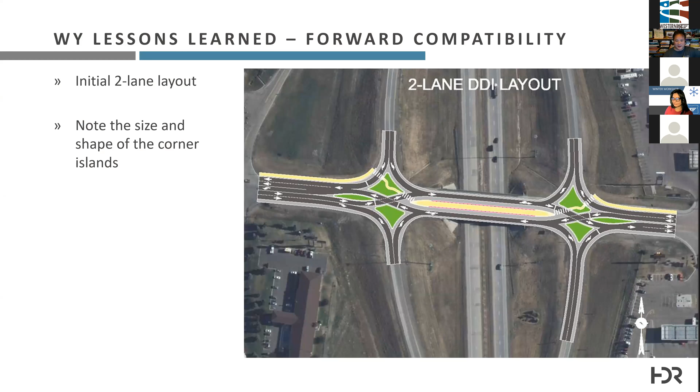One of the stipulations during the development of this project up front was, do not touch the bridge. One of the things they came out with after the fact was a design that doesn't touch the bridge, and works for everything, all the criteria talked about up to this point. Then they came to us with a strange request, seeming rather gleeful about it. They said, if this bridge happens to get hit, which would be cool, we could replace it. So can you also develop a 4-lane DDI that we could retrofit in when this bridge gets hit? It seemed like an odd request, but we said, yeah, sure, whatever.

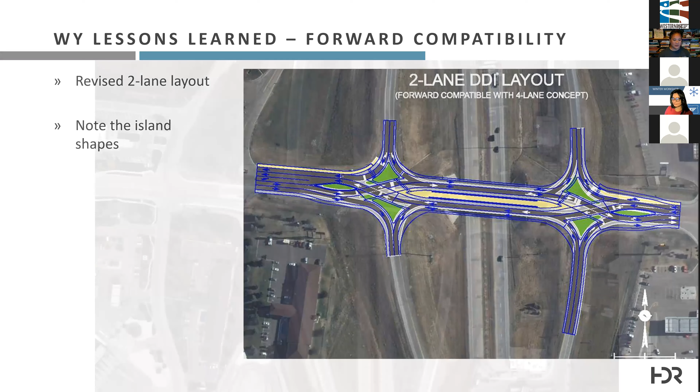So long story short, these weird modifications and the fact that these islands look as strange as they do is specifically because this is designed to be retrofitted forward into a 4-lane DDI.

So widening a DDI from 2 lanes to 4 lanes sounds intimidating because that extra lane, you can put it on the outside here, but the outside becomes the inside becomes the outside since they reverse traffic like that. So the moral of the story here out of Wyoming is, yes, you can build a DDI that can be widened, but you need to design the widened DDI first and then retrofit the design of the interim into it.

Now, this interchange - I built this presentation and this slide a while ago - this is the US 36 interchange in Louisville, Colorado. If you were to go out there today, this was ground zero for the wildfires that took place in December. So there isn't a single thing left standing at this location.

That being said, one of the things I wanted to highlight is that this interchange is unique in that it has express bus service running through the core of it in both directions. It also has bus stops actually embedded in the core of the interchange. One of the things that made this possible was the fact that this was only the second DDI ever built with the pavement slope designed the way this is. I'm going to show you what that pavement slope design is right now.

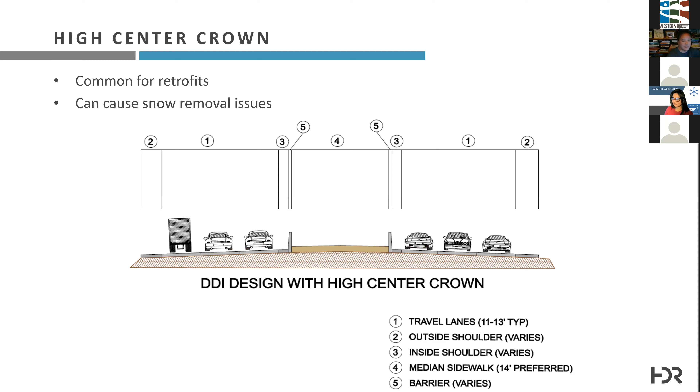So what you don't want is for snow to get piled up in here, and then on those days when it's warm in the day and cold at night, it planes off, melts, planes off, and refreezes at night. That's not an ideal situation, to say the least.

This particular design was one we developed for the first interchange built in the snow belt in Wisconsin. For those from the Midwest, lake effect snow is a real thing, and it comes down in bunches when it happens. Up here in Appleton, Wisconsin, this is an area that gets buried on a regular basis.

This was the first DDI in the country ever built with a low center crown. That means the pavement slope always goes from the driver's left to the driver's right as they navigate through the interchange. This whole system was set up with the idea of storing snow in the core of the interchange during the winter months.

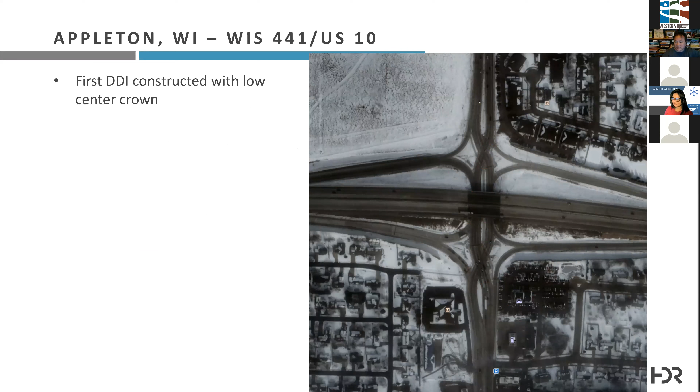Going to construction, one of the big things we did at university was to make sure we plastered social media and blasted out text messages to mailing lists to help people navigate stage by stage as we went through the project process and staging.

One thing we noticed right off the bat, much clearer from the drone view here, is that during construction you need to be very cognizant of the old lane lines, because the old lane lines are the easiest lane lines to see when it gets wet.

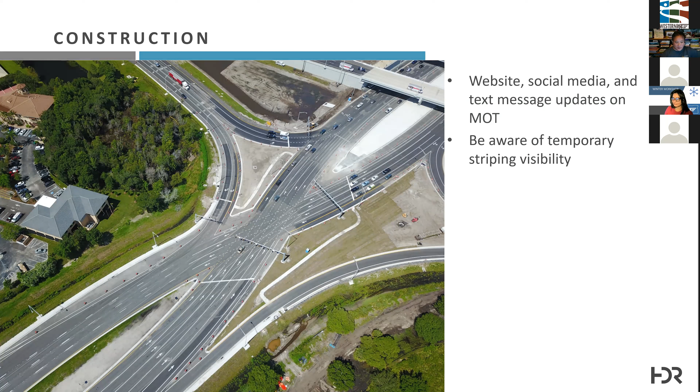I'm running a little low on time, so I'll breeze through a couple of these. Now, a couple of big lessons learned on post-implementation. We're going to go over those in the next couple of slides.

This one has to do with signal timing. Right now there's a green, it's green for the eastbound direction, and it's about to go red. Once it goes red here, you'll notice that in this location, both the through movement and the turn release at the same time. That should never happen.

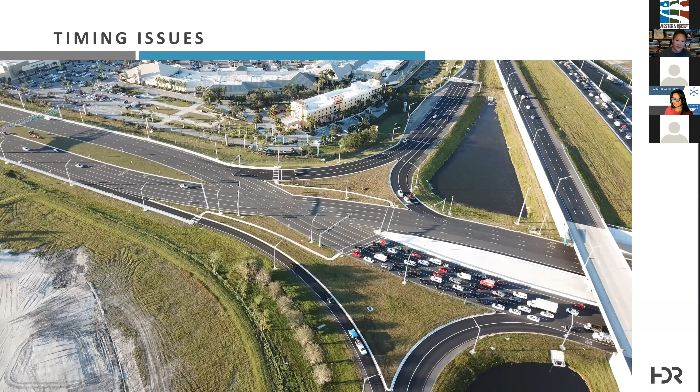And the reason it should never happen is this: really, what you want to look at is calculating your yellow and all-red for your through movement based on the time it takes those people to cross that distance. But you don't want these people sitting here at A to wait until this additional distance has been cleared. So you want movement A to be released sooner than movement B.

So when you're calculating your yellow and all-red, it's extreme in a location like this because the crossover is 5 on 5. It might not make as much difference when you're 2 on 2 or 3 on 3 at the crossover, but at a location like this, it makes a huge, huge difference.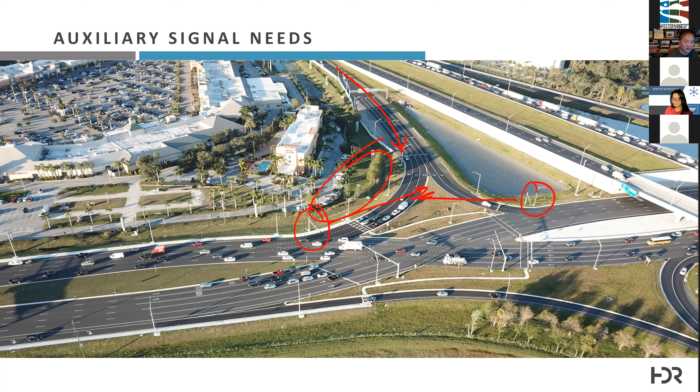Going to overhead signs: place them on the outside of the bridge. And one thing you'll also see is, when you have 3 or more lanes on the approach, make sure to put overhead truss signs up there so people are lined up in the lanes you want them to be. Once they're past this point, you do not want people changing lanes in the core of the interchange.

One thing I want to show here is we added an additional lane through the interchange. We added it here as a right lane add. That right lane really facilitates the movement coming from the ramp to do this, because we wanted to make sure—and you can see the pavement shields here on the ground that say north only for 75.

We wanted to make sure that any ramp traffic going to the left was already in the lanes we wanted them to be in. We didn't want to open up a left turn bay in the core of the interchange. We wanted them set up before they got into that core.

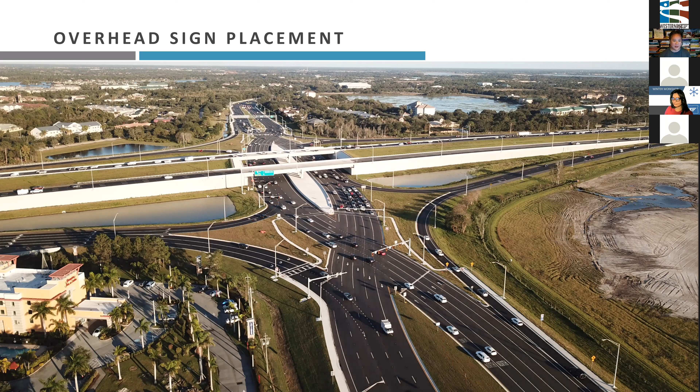Now, this is a mistake we've seen many times, and I made it myself back in 2012. This crossing here, go ahead and make it as short as possible, make it perpendicular, because that drives your pedestrian clearance time, even though it's not a big deal at a two-phase signal. But do not make this crossing perpendicular. Angle it to the extent that you can. The reason you angle it has to do with where people are going to stop, and I'll show that on the next slide.

The other issue is, and we did this without knowing because the ADA guidelines hadn't been modified yet at that point, both push buttons are on the same pole, and today that's a no-no.

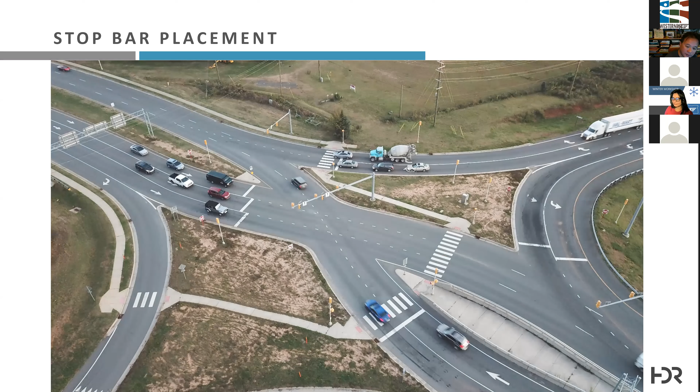Now, the reason I say you don't want this stop bar perpendicular is it creates a lot of space between here and here. When people can't see where the stop bar is due to rain, fog, or snow, they're used to thinking, okay, this is where traffic is right now, there's probably a crosswalk in here, so I'll stop a certain distance from that conflict. Well, when the conflict is that far apart, notice here the signal is green for this movement, but this guy stopped on the red nowhere near the stop bar. He's overshot the stop bar, he's overshot the crosswalk.

Once we did the traffic analysis, we told them: okay, you fix this, which is your obvious problem today, and turn it into a DDI, but this interchange is still going to fail. And locals asked why? We told them it's going to fail because this intersection is going to fail, and because this other intersection is going to fail.

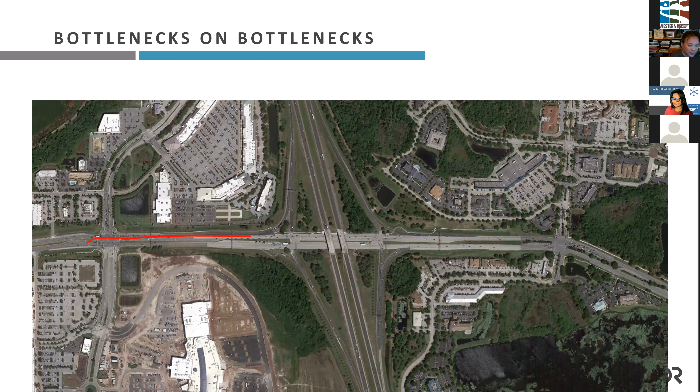It just so happens that the main facility, I-75, is a state route, but the crossroad here, University Parkway, is a county route. And worse yet, the county line splits it like that. So one county has this signal, one county has this other signal, and neither one was interested in doing anything to those adjacent intersections.

So the project got built, and the project looks like this. In the interim, to do as little as possible, on the west side they built a triple turn lane with about 3,000 feet of storage, and it overruns today, starting to back up into this area. Within probably 5 to 6 years, it will likely cause the southbound exit to collapse, a lot of that due to development in the southwest quadrant, including an international quality rowing facility.

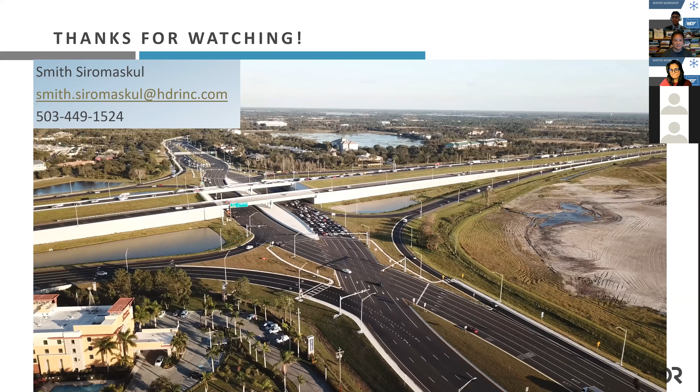I was wondering, Smith, if you could talk a little bit more about the bicycle considerations in a DDI, since you mostly covered pedestrian considerations.

Sure, in fact I had a slide set up just for that, I wasn't sure I'd have time to get to it. Let me pull that up. Bicycle considerations: one of the things is it's more straightforward than the pedestrian side, for sake of argument. Basically, with the DDI design, you keep them to the right. Seriously—all right, let me try using the highlighter to show it.

With bikes, basically what we do is put them on the right side of the rightmost through lane, come through the intersection, and they basically stay all the way throughout in both directions.

Fairly straightforward. For future conditions, what we'd like to do on other DDIs is perhaps build in a scoop. So the moment they cross over this crossover intersection, instead of being caught and pinned behind the roadway and the rail here, if it's wide enough, we can basically scoop them up and put them on the inside.

One of the things also coming into play, and I think this is something we're going to look to implement going forward, because this came up for the first time on the interchange we're doing right now in Brisbane. One of the issues the Australians pointed out — keep in mind, they've got two, one in the ground and one in final design now, and we have hundreds here in design — is that this never came up in the US.

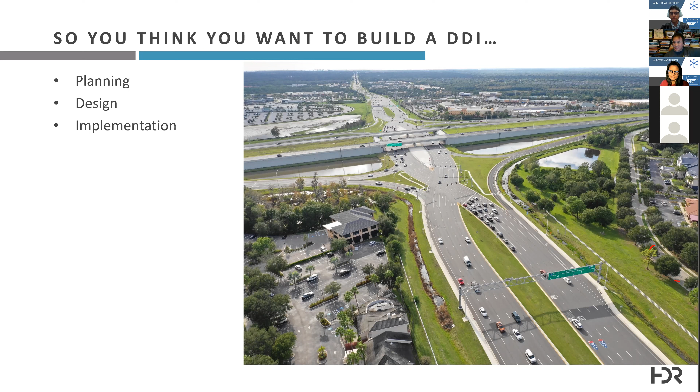Now, have I ever recorded one? No, but I've been out on so many of these sites that I've seen plenty of bicyclists navigate DDIs. For the most part, what I see them do is go into the median. So instead of running along the right side of the rightmost through lane on the bike lane or shoulder, they'll often slow down, hit the ramp, and come into the core of the interchange.

The Brisbane DDI — actually, I forget the name of the town now, it's just north of Brisbane — the DDI we're building there intentionally has a scoop for bicyclists to get them up and into the core so they're not running adjacent to live traffic.

I have another question, Smith. How does bike, and I guess mostly pedestrian, safety at DDIs compare with other interchanges? It's becoming more common, but it's not as common yet.

Yes, there's a misconception that DDIs will be more dangerous or scarier. So imagine, compared to a standard diamond, you're crossing this location. A pedestrian making this crossing could get hit from this direction or that direction. Likewise, crossing the receiving side, you could get hit from this direction, or potentially by somebody coming through for whatever reason.

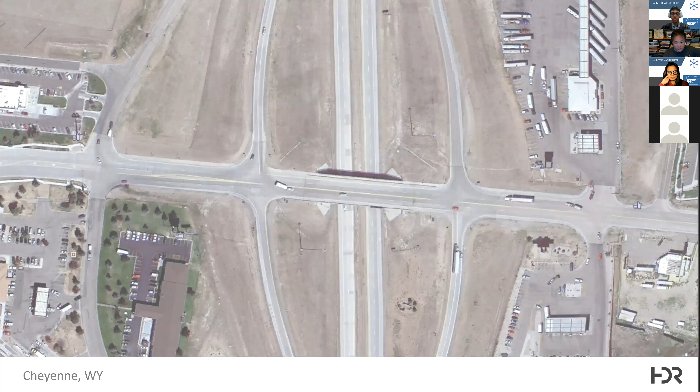But at every opening a pedestrian has to navigate, they have to watch for multiple directions of potential conflicting flow. Looking at how a DDI is designed, at each pedestrian crossing they're only crossing one direction of travel at a time. Compare that to a curb-to-curb crossing of 40 to 42 feet even on a single lane ramp. Here, the crossings are more or less perpendicular to the traffic flow, so even though it's a single lane, you're really only crossing about 20 feet. The crossings are discrete, shorter, and you're only crossing one potential movement at a time.

No matter what opening you're crossing at a DDI, the pedestrian only has to look in one direction, because there's only one flow to worry about. So from a theoretical standpoint, we surmise it would be safer.

But frankly, the before-and-after studies that have been done have yielded very good CMFs for cars, simply because there's plenty of data for cars. 99.9% of traffic going through an interchange is vehicular. We simply don't have a statistically significant amount of data to come up with a CMF for multimodal or active transportation modes. One interchange I'll tell you about is a DDI in Colorado.

This particular one in Colorado was one of the top 5 accident locations in the entire state. It's not in Denver, Boulder, or Colorado Springs, but in a suburban area in between two towns. They used to average 5 fatalities a year there, and had 3 pedestrian fatalities in the 6 years leading up to the implementation of this interchange.

Since then, I don't know the stats for the last 12 months, but in the first 18 months this interchange was open to traffic, the only accidents that occurred were property damage only, and none involved pedestrians.

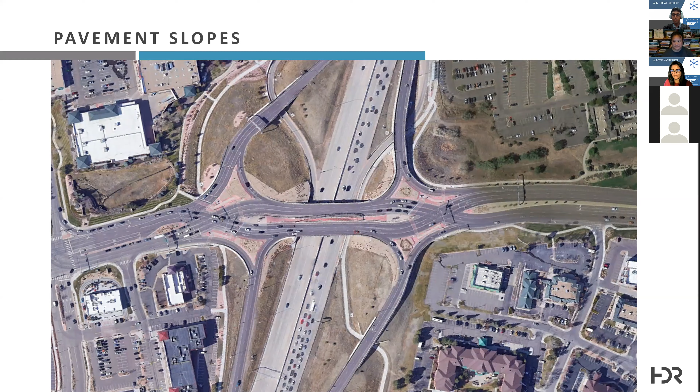Smith, there are a few comments in the chat from Michael about the advice to design the final state first, that it really applies to all types of design, and he's done many traffic signal designs that way too. Absolutely, totally agreed. Otherwise you end up with stupid stuff like poles and mast arms in locations where you need the laneage later.

Great, and that he's been looking forward to presentations on DDIs ever since he saw you working on these designs while attending other ITE events. Oh, I'm touched, thank you very much.

And a few more comments coming in. So, fun presentation as always. Thank you. Thank you, take care, thank you.

Great, so Cadell, right, we were trying to do breakout rooms for this one, but we don't have that. That won't work with this link, right? We need to send out...